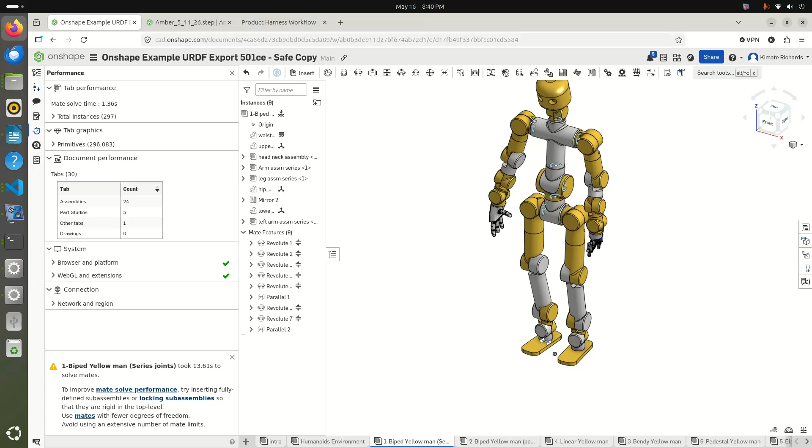Here it is inside of the CAD and OnShape, and this is the yellow man. But if you look, there's a list of robots that you can also utilize, and we'll leave the link in the chat for the various robots that do exist.

The one that we're going to take a look at is this robot called the pedestal yellow man. We'll look at that in a minute, it's kind of loading in the background. We'll take a look at the pedestal yellow man, which is this one, and also take a look at that inside of the URDF file itself.

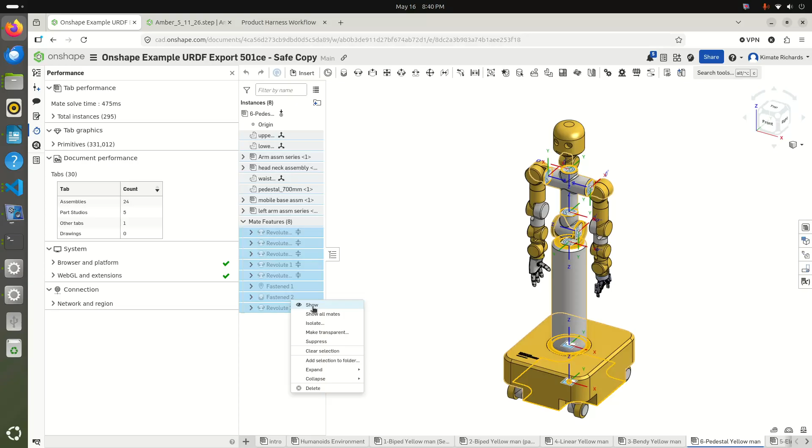What we're trying to accomplish is, as you can see here, if we just expose these, you'll see these are all the mates that it currently has. So there's some fasten mates and some revolutes and continuous mates, I think there's just all revolutes. But you can see here, these are not all the articulations possible. There's one here, there's one here, there's one here.

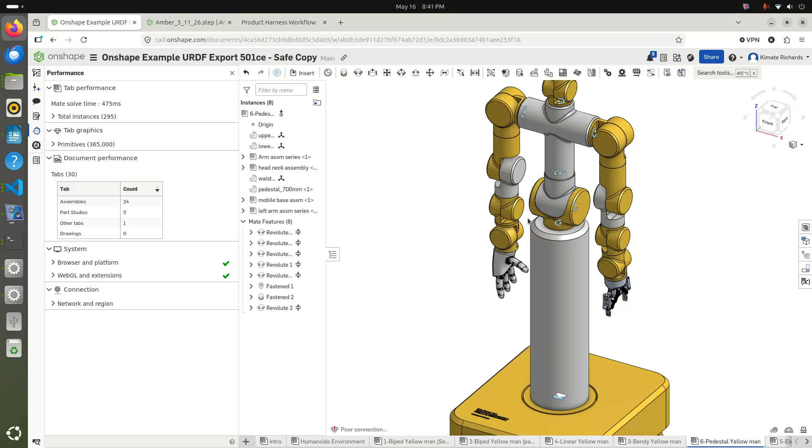They take quite a bit of time to do this manually. You have to hide some components, show some components, make sure you have an assembly. It's quite time intensive. What we want to get to is a place where it's not time intensive and you get back all of the possible articulations, plus possibly more depending on how liberal you let the models try to run themselves.

At 10 Things we've created this product harness workflow, and I'm going to show it in a minute. What it does is it takes a look at the entirety of the CAD model and your description and says, alright, it looks like you're supposed to have more articulations. We will make the articulations that you asked for.

If the materials are wrong, say you really wanted this to be some kind of soft cloth material, you could take this exact part and turn that part into exactly what you wanted for the various simulators that you want to run. So say you wanted to export this to a URDF, then it would function as it's supposed to function.

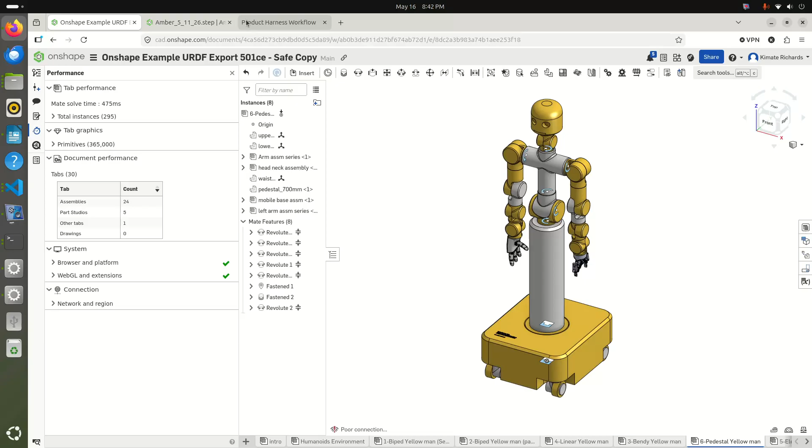So we're going to keep this video kind of short, just to show you what the output of something like this looks like. I'm going to go to that particular project and let me continue on that project.

What you'll see is if we go to the CAD source, it tells you exactly what the CAD source is, what you're trying to accomplish. You can type in what you're trying to tell the harness to do, and you can do that on the left or the right. This is kind of a chat view, and this view is more of a workflow wizard.

It'll create an MCP plan in which it'll inspect the model that we're trying to use. It'll then go ahead and copy it over time. Let me just show you the results.

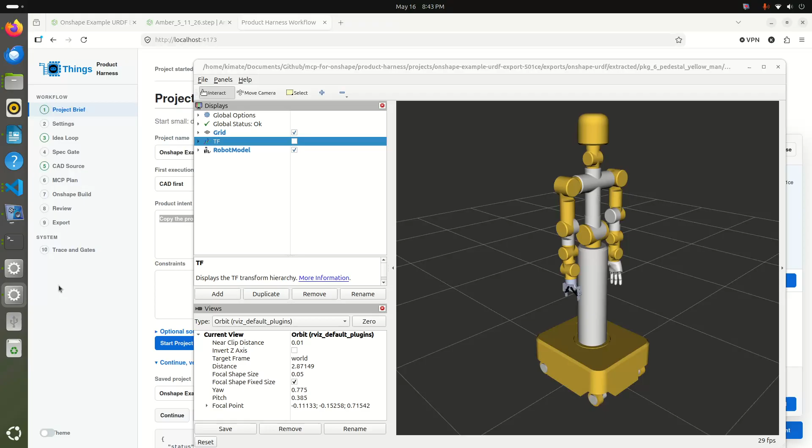They're not exact, you have actually more articulations than is possible by a little bit. But I'd rather have more and have them be exact than less.

To make something like this would take you quite a while to go through each joint and each link and make sure that it's absolutely perfect. So this is something that the MCP tools and your favorite model will be able to do by taking a look at the robot, all of its joints and links and all of those things that exist, all the mates, all the places where it looks like there should be mates, and it'll add those in.

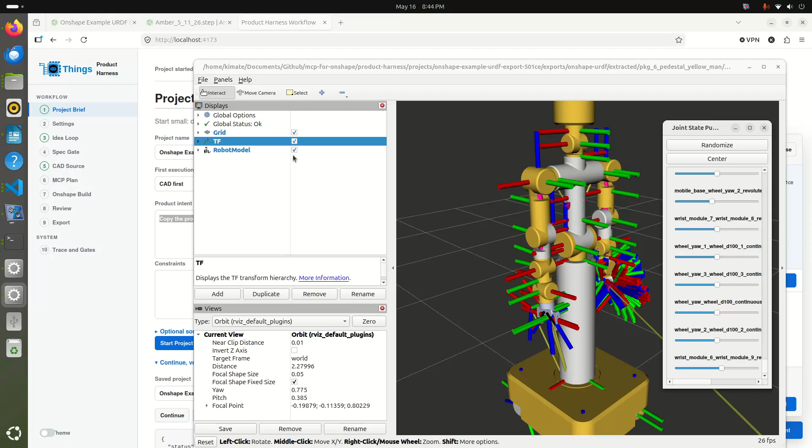Let's just make something move. That's usually the most exciting thing about when people see my videos. You can take, let's say, this whole wrist and move the wrist. Yes, I'm showing you the transformations on purpose, but we can also hide those, and then we won't see the transformations at all, and then still go back, and you can see that some of the things will move. And something like this would take you quite a while if you, so there's the shoulder roll.

It will kind of misname some things, like that's the neck turning right there. But these are things that I would rather definitely deal with, or having some joints that, so here's the fingers moving. I'd rather have some extra joints that I can simplify rather than joints that would not be present, that would take me a long time to fix. So there's the shoulder movement, and on and on and on.

So the naming is something that you still probably want to go back and name some things again, because I like to say left X, left blah blah blah blah blah, instead of the way that it wants to interpolate these kinds of things. But the idea is dead on. So like to create that finger movement and to have it be nearly the correct joint limits is one giant step that you don't want to kind of redo again.

So here are all the links that it's come up with, and joints. Like I said, some of them might be not what you were expecting, but because what it does is it looks through each part. If the part doesn't have any kind of naming that makes any kind of sense, like for instance, if there are not motors in here, or bearings or anything like that, it will think that this is not a part that needs to articulate. So these are the kinds of things that you would still want to deal with in your CAD model.

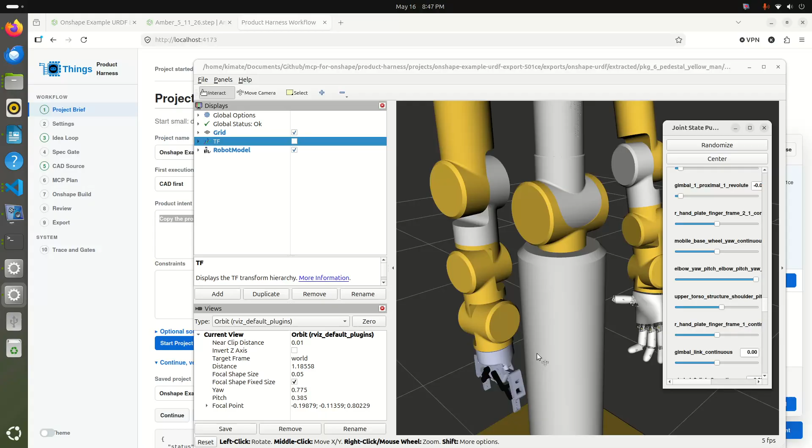But one of the more important parts about all of this is that now I have an exact CAD model, an exact URDF from the CAD model. Nothing is simplified here in a way that you lose the fidelity of any of these parts. These joints here, if we look closely, the transformation is exact here. The materials are exactly the way you had it before. The joints have been created and calculated in the way that you wanted them to actually show up in real life, versus what we do normally with the URDF file.

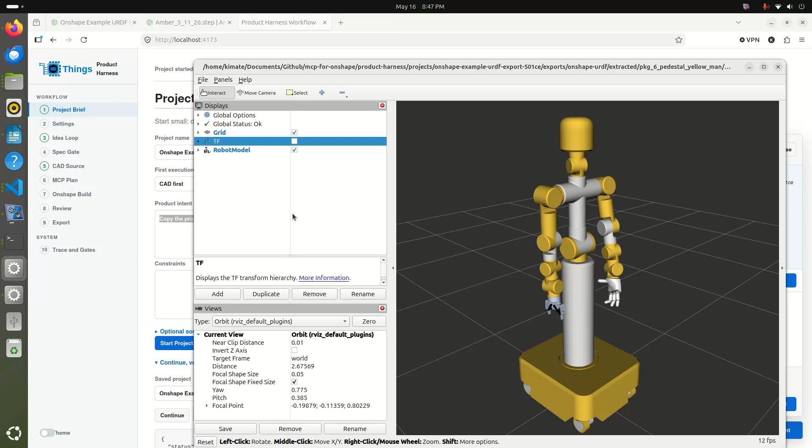We simplify it. So this is a kind of long video, so I'm gonna stop this here. But I did want to show you a little bit about what ends up happening here. As I do a readiness assessment, I have kind of told that there's going to be some expected links and expected joints, but it tells me then, it gives a score of essentially what it thinks should happen when we export this URDF file.

There's 113 parts, 115 mates, 13 unmatched parts, so it's going to have to fix that. And it said that the right arm has some issues, the left shoulder has some issues, expected some links, expected some other things. So it's going to go through with this plan and execute this plan. Well, I already done that, so we just saw the output of that, but it did go through and say, okay, these are the expected plans, and this is how we executed against the expected plan. And so we'll stop there, but I think this is a huge step in the right direction.

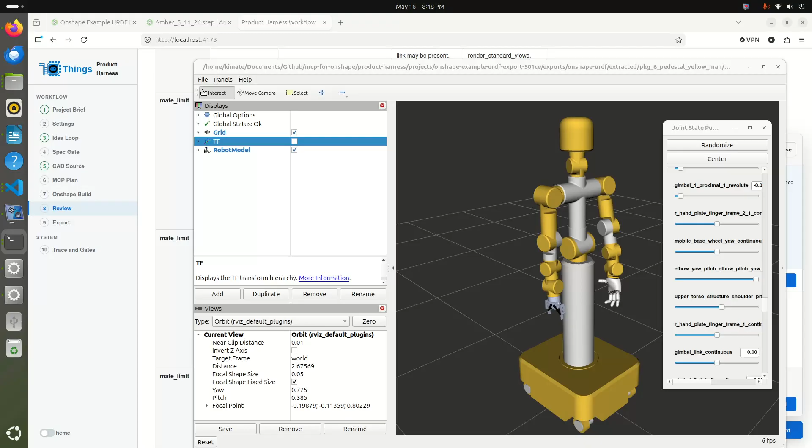And one of the things that can come out of this, and just to give you a little bit more of a look into 10 Things, is one of the things that come out of this is now I can create an entirety of a code base based on the fact that I have the URDF file correct, I have the CAD model correct. Even if you don't give me a line of code and you tell me that the processor is a certain processor, or you tell me that you want to use maybe ROS2 and you're using a Jetson Orin, I can create the code that I need from 10 Things Discovery Hub, and that's something that we can go over at another time.